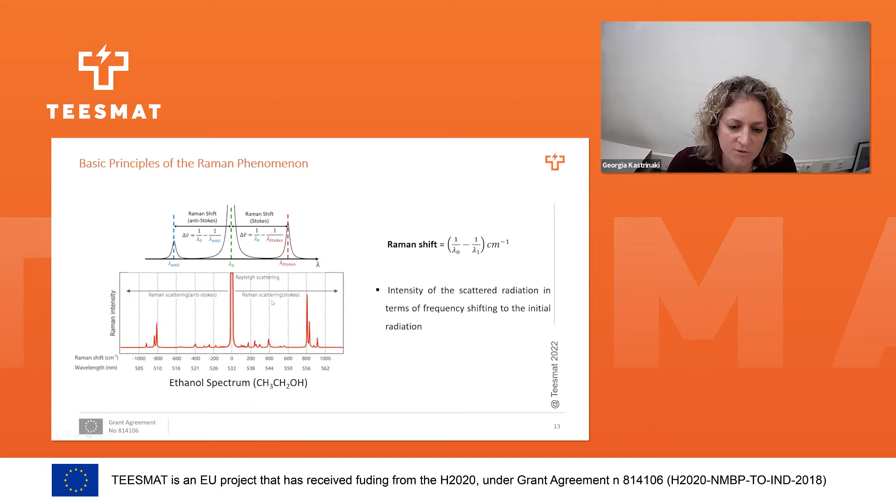This is a typical spectrum, for example, of ethanol, and these are the wave numbers that we showed before. So literally, when we're talking about Raman scattering, we're talking about the shift these wave numbers have relative to the Rayleigh, and this is the part of the spectrum that we are always studying. So when we're talking about Raman spectroscopy, we're talking about the Raman shift of our modes relative to the laser source.

Now, which molecules are Raman active? As we said in the beginning, we can have gas, solid, or liquid molecules, but actually not all are Raman active. We need certain molecular symmetries for those molecules to be Raman active. Typically, well-known symmetries are those of the ammonia molecule and water. In ammonia, we have the C3, which means we need to turn the molecule 360 divided by 3, so 120 degrees, in order to get exactly the same molecule. And the same is with water molecules when we turn them 180.

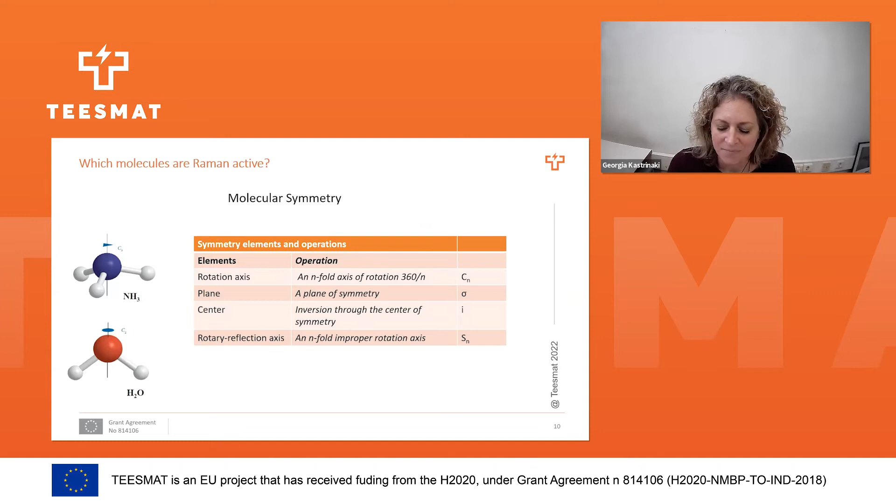So here are the basic elements of symmetry that we meet when we're studying molecules. We have the rotation axis, the n-fold that we just explained. We have the plane, which is the kind of mirror in our molecule, the center of symmetry, and the rotation reflection axis, which is the most complicated, where you have to turn your molecule vice versa in order to have the same one. Anyway, we'll not go into these details.

Now, this is a micro-Raman instrument. This specific one is from Renishaw, a very well-known producer of Raman systems. It's a very compact one, and it's one of the 3 systems we have in CERTH.

It's very easy to use. It's basically for engineers who are doing applied science, so you don't have to be a physicist to know the deep physics inside Raman in order to use this. It's very applied.

What happens inside this system is all automated. When you use it, you have a laser source, and by different mirrors, you follow your beam into the sample. You focus onto your sample, and define what part of the surface you want to study. You see the microstructure of your sample through a lens, then focus the beam, and by backscattering you follow the Raman signal into a holographic edge filter where you open up your beam. This is led to the spectrograph and the detector, and the computer gives you the Raman spectra ready to use.

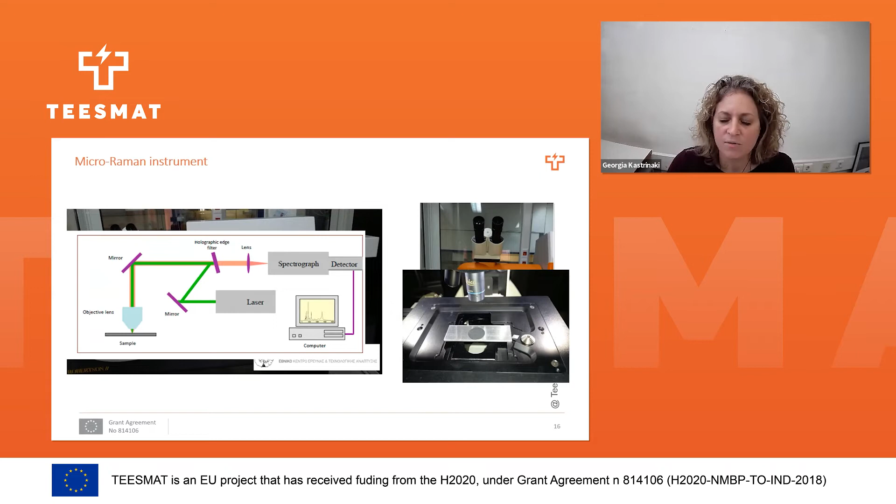Now, an example from energy storage applications. We tried to develop an active cathode material, from a non-cobalt active material. It was from the LNMO family, following a spinel structure, and we tried to dope it with iron, magnesium, and aluminum in order to see different kinds of effects on its capacity, aging, and cycling.

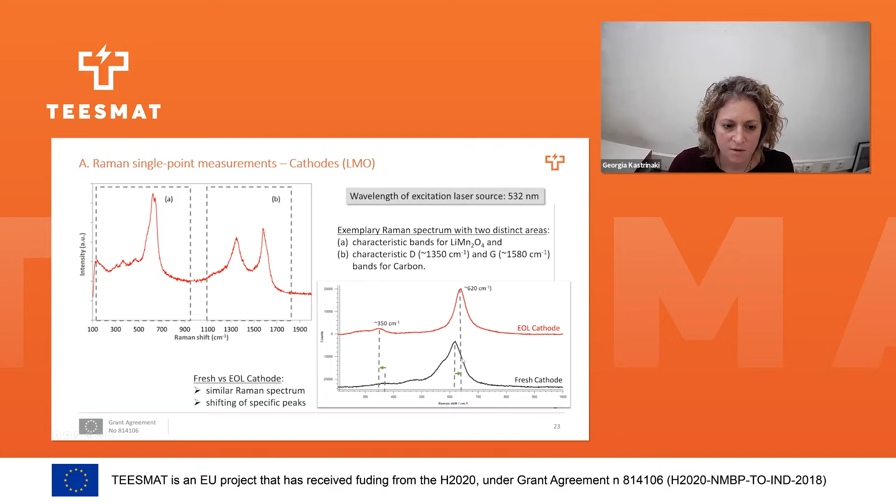Something very typical that we do in a Raman spectrum is that, according to the literature and theory, we're expecting different kinds of vibrations according to the structure. For example, in the LMO, here you can see the types of vibrations we are expecting, so it's more than one, but the most prominent one is A1G, which is the manganese oxide.

This is also the vibration I showed you in the previous example, the one that has the major shifting. The other one that also shows quite a difference is related to the delithiation process. It's also manganese, but manganese in this kind of structure, and once we see a shifting in this mode, we understand that lithium has been extracted.

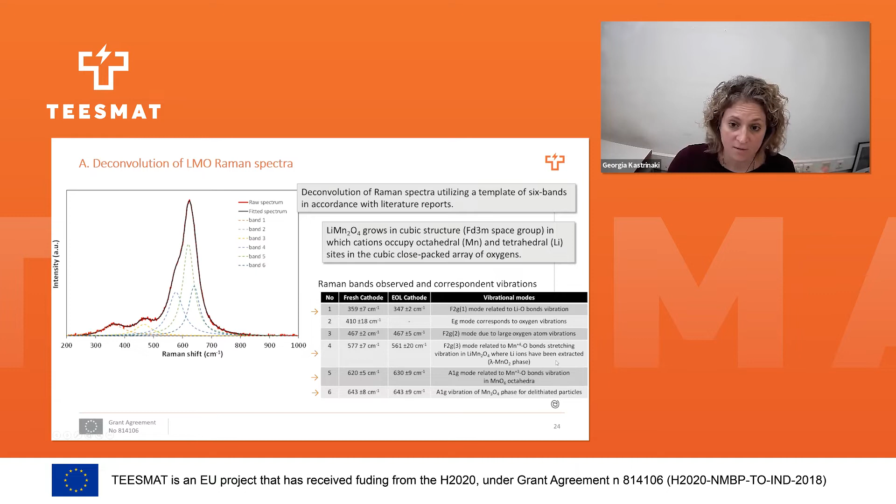Here are images of the Raman mapping that we can create. At this point, what we tell the software is that in terms of colors, we want to have the shifting of the peak. So the blue ones are more attributed to the fresh sample, which is 610, and those with lighter colors, green and red, are attributed to 640, which is more the aged formation we expect.

What we see here is that this is the fresh sample. More of the sample, of course, has this blue color in our image, and the aged cathode exhibits more red color. So we immediately understand that during aging, we have a shifting of our peak related to the manganese oxide.

This is exactly what we see here. At the fresh one, more peaks are here, and while we cycle the material, we see the peaks shift more to 620, which is related to aging.

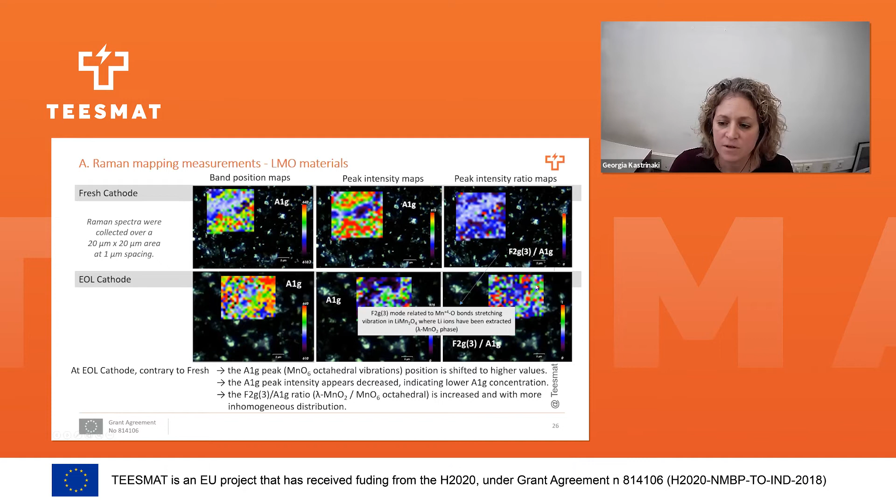So we can understand the mechanisms of degradation by our chemical composition.

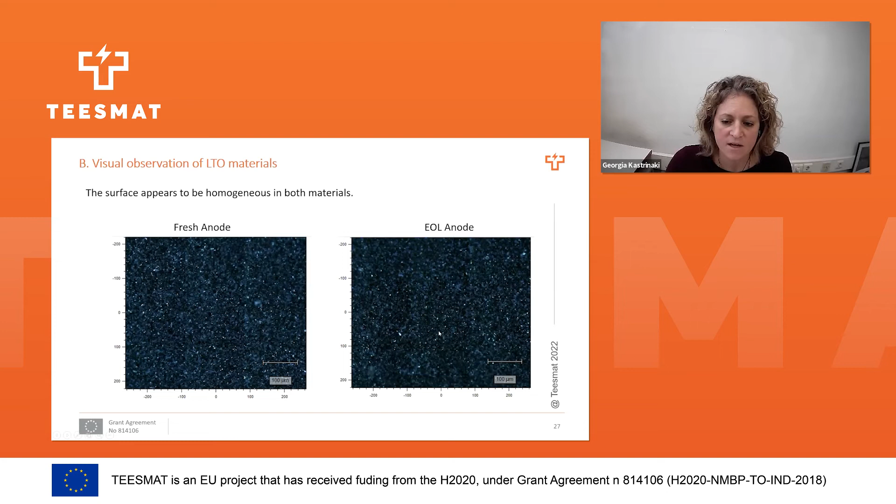Now, the second material that we observed was the anode, the LTO. Again, we had no differences in terms of morphology - both materials are quite homogeneous. And again, we have the spectra of LTO.

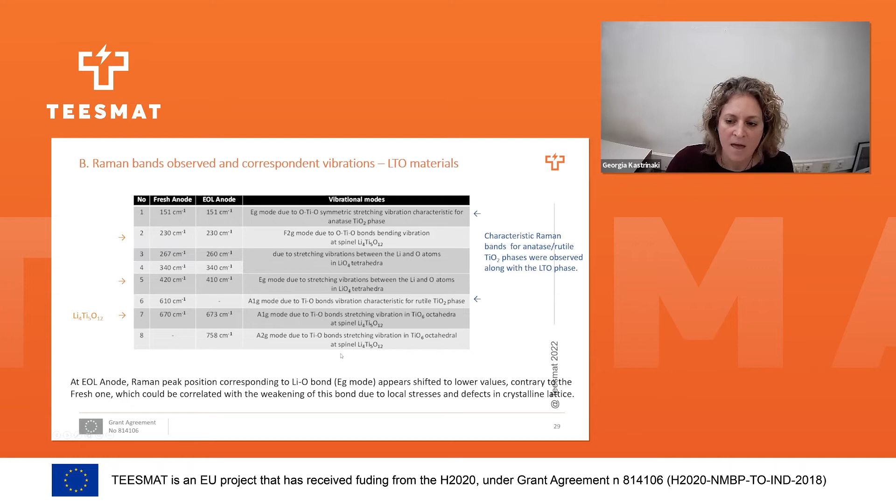This is related to the spinel structure of LTO, and these are the mappings that we obtain. Again, it's not like we have a decrease of the intensity if we compare the fresh and the cycled spectra.

What we see is that we have a higher concentration of the regions having LTO, so we can also see part of the 610. We have larger areas of red, so it's not that homogeneous anymore. So we have alterations of our chemical structure.

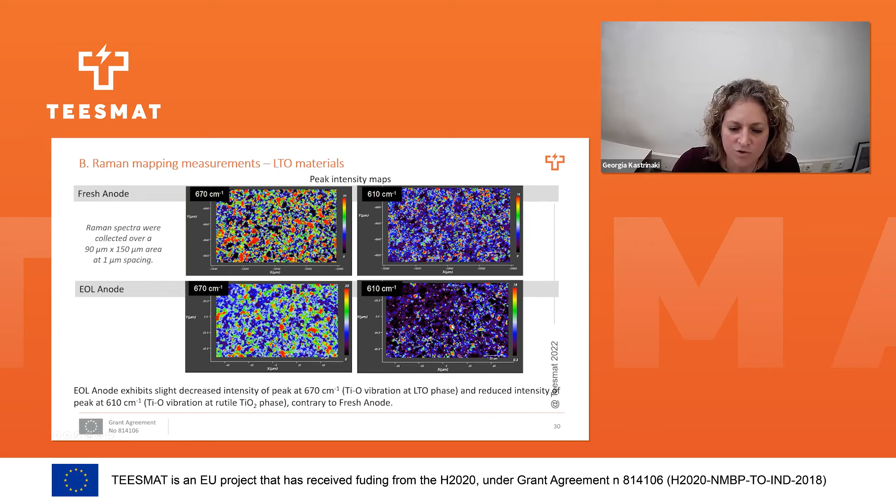And the second example I will show you is the one on Genes'Ink. Genes'Ink is a company that is doing copper ink printing, and they're doing electronics, but they're also printing copper foils on organics or on inorganic substrates.

Typically they had an issue with the changing color of their material, probably caused by oxidation. So they wanted to study this effect. They sent us fresh samples that we left to age for some months in ambient conditions, and we saw that the color indeed was changing.

So we wanted to see what type of oxidation it gets. We again performed the in-situ study, which is a study of the material as it is. According to literature, we have three types of copper oxidation states.

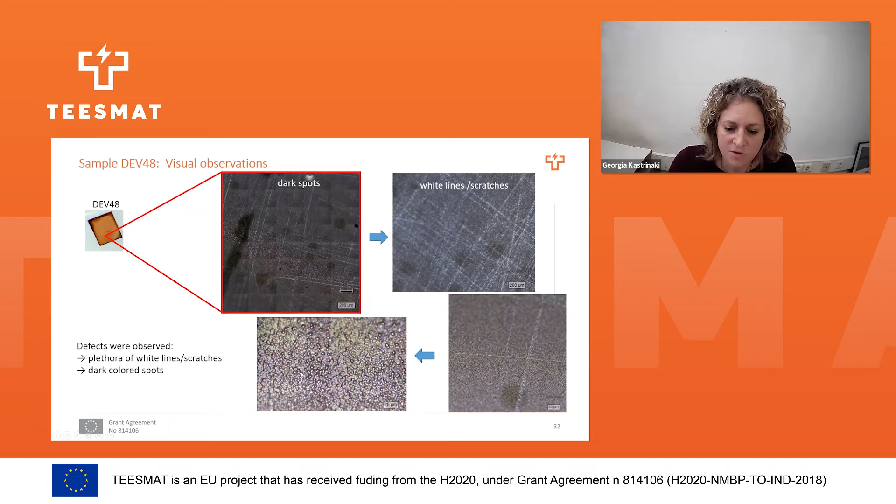We tried to compare the different kinds of spectra obtained from different regions. Here you can see this is probably a problematic region that needed further study. So we have here a source of oxidation, and this causes different kinds of color as we move away from the source.

But as we move forward to spot 4, which is probably the source of oxidation, we see that it's totally oxidized copper oxide. So for some reason they have some spots of oxidation, which we cannot understand how this happens, but this is later, let's say, transferred to the whole structure.

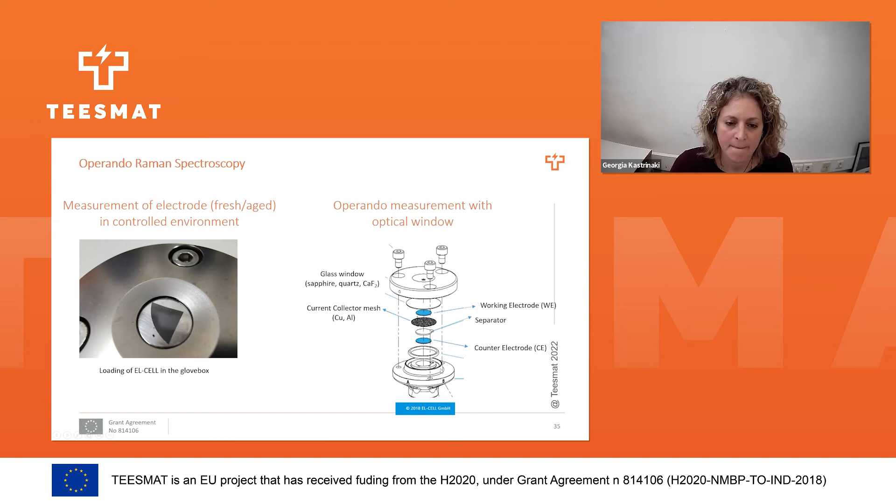Now, if we see a section of this cell here, it's quite different from the typical lithium-ion batteries that we know, because here, for example, for a half-coin cell, we have our lithium metal at the bottom. We have a separator, and then what the lithium sees is actually the copper foil, and on top we have our active material, which can be observed by the tool that we have on top.

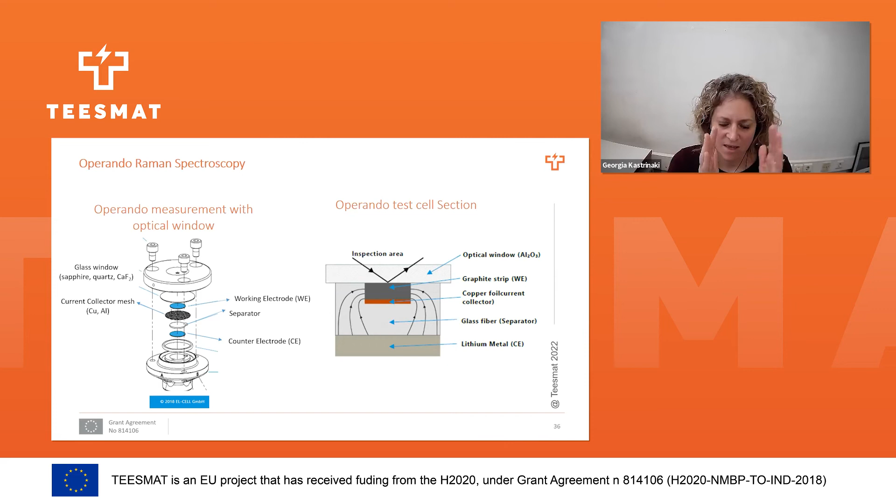So at the beginning, when I wanted to synthesize the first cell, it was quite challenging because I literally did not understand. Usually we have the electrodes, one facing the other. In a typical electrode, you have the surface of the anode and the surface of the cathode, a separator in the middle, and then the intercalation of the lithium ions inside the anode and vice versa to the cathode during cycling. But at this point, you have something quite different.

What happens is that the lithium ions do not follow this route, but the working electrode is actually receiving the lithium ions from the side. So it's a different kind of inspection. If this is a graphite strip, during intercalation, when you are charging, you have the lithium ions coming from the outer part to the inner part, and then during discharging they move back again from the outer part.

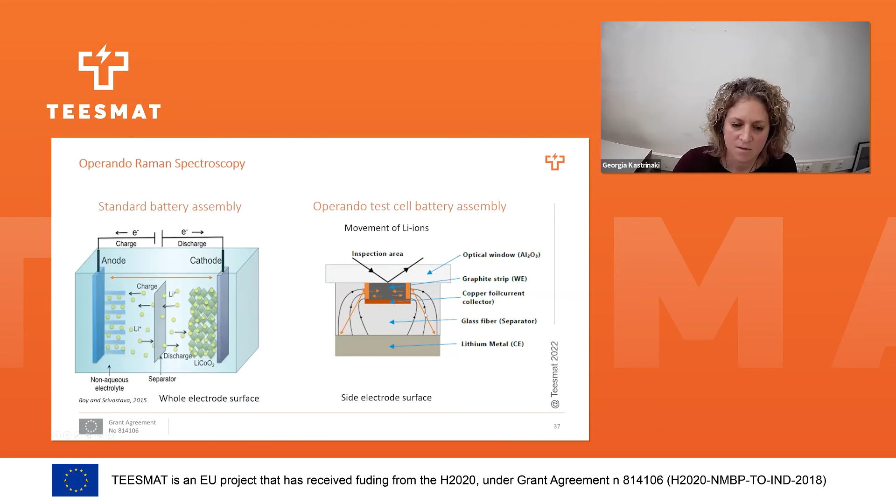What I found interesting is that this is all from the EL-Cell company, from which we bought this electrochemical cell. You can have different kinds of operation modes. One of them is that you can have them one beside the other, and you put the separator on top. They have a very interesting video that I wanted to show you so we can understand exactly how this thing is working.

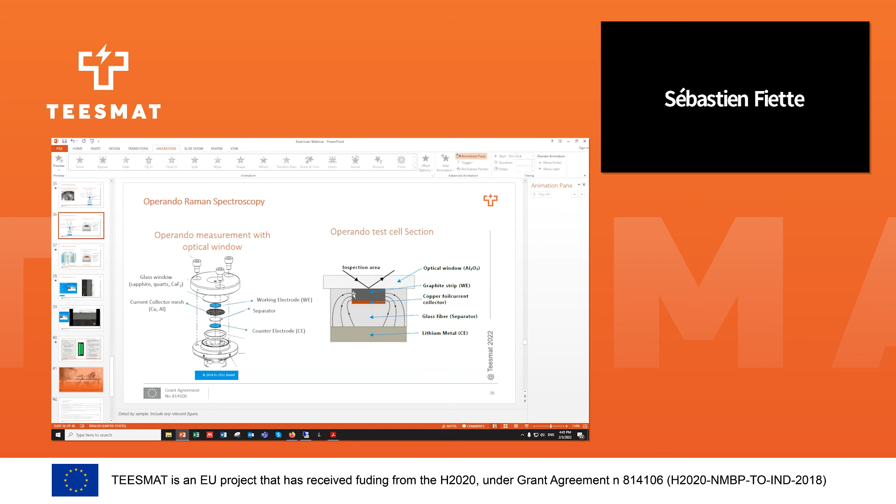Yes. Okay. So what you see here is what we also see on the microscope. Literally, this can be the electrode of a working cell. Here is the lens that the beam comes out of. So we immediately target and see under the microscope the part of the electrode that we want to study. And while the cell is cycling, we get the spectrum from this specific point.

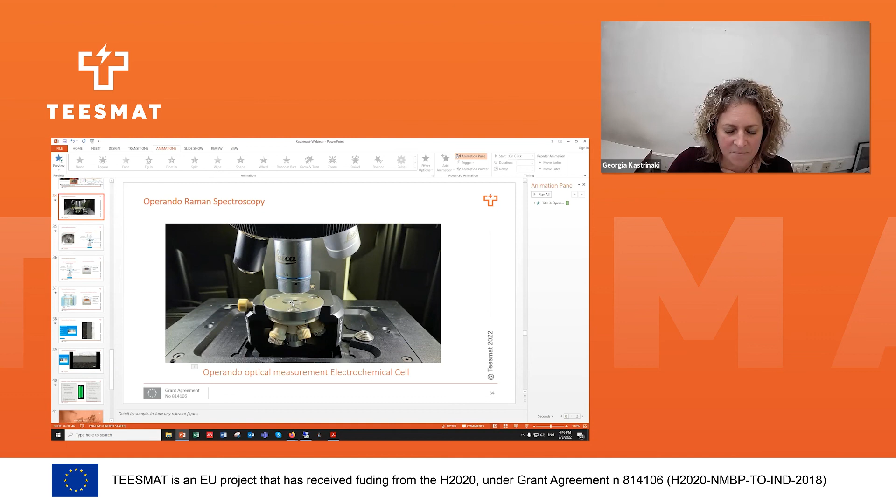I hope it was understandable how this kind of cell is working. It's not like the two electrodes are facing one another. It's just that the lithium ions are coming from the side. Okay. So it's the same kind of operation. No, it's the same chemical reactions happening, but it's a different kind of operation. Okay, thank you. It's clear.

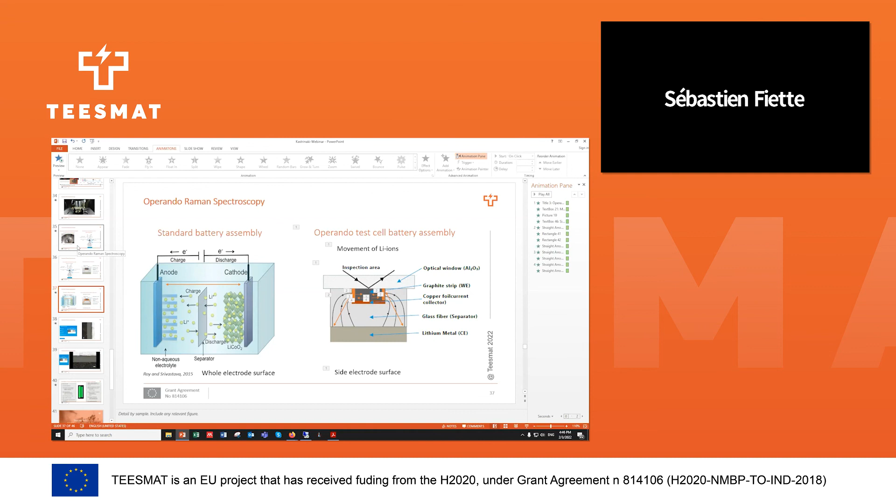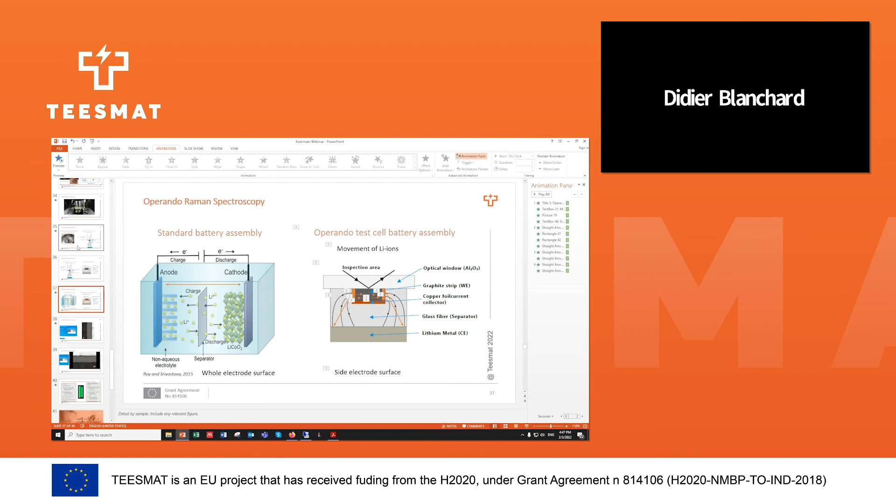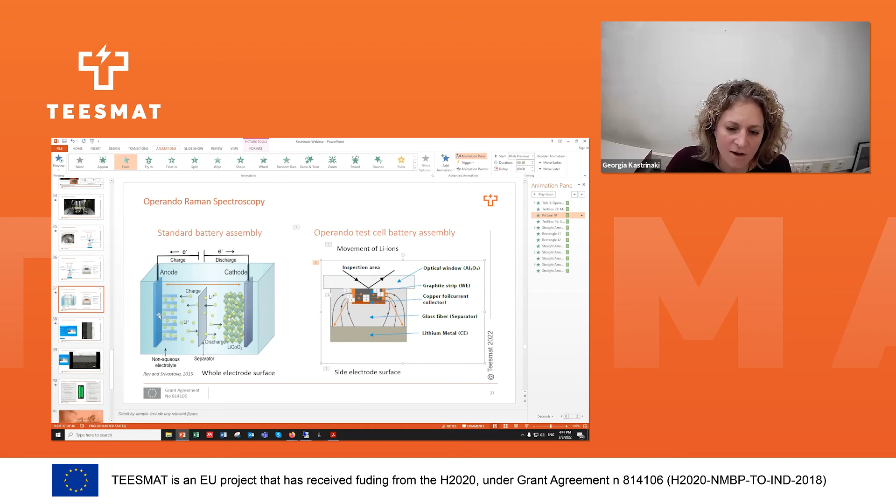Yes, Didier, please unmute yourself. Didier from ESRF. Here on your picture, I have a question. You're not using a grid for the copper foil current collector, right? In this one there is, but it's not shown, for better looking. You need to have a grid here somewhere, which is a mesh, which means that the electrolyte can come in and out, and the electrons are led by this mesh to the system, so we get the current. This mesh ends up somewhere in the system, and the electrons go to the potentiostat.

Have you performed some in situ measurements with such a configuration? Yes. Don't you have any trouble with the swelling of the active material with the beam focus? Yes, it is one of our issues. We're trying to optimize the technique right now. Indeed, by beaming, the electrolyte increases its temperature. But we have seen that by using a different laser wavelength, we have 532, but now we're trying with 785, the increase of the temperature is much lower. So this is one of the things we have tried to optimize the technique.

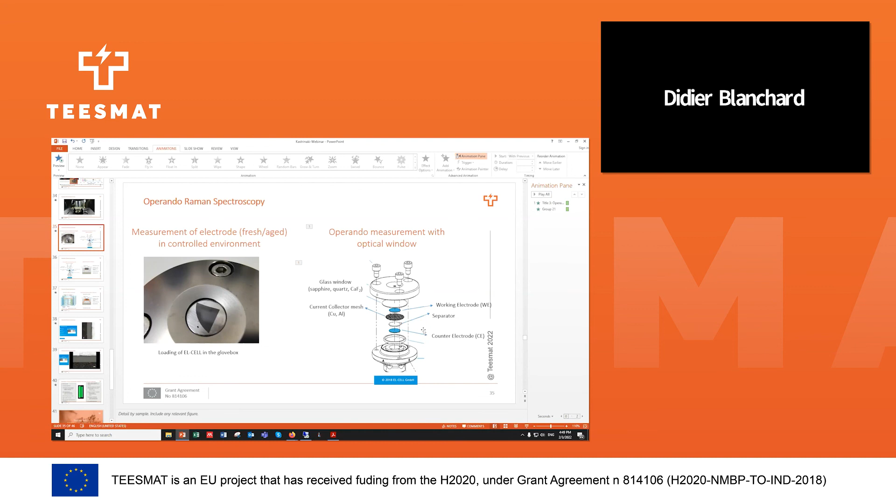You can also reduce the range you scan, to limit the exposure time, right? Yes, correct. Thank you. You're welcome.